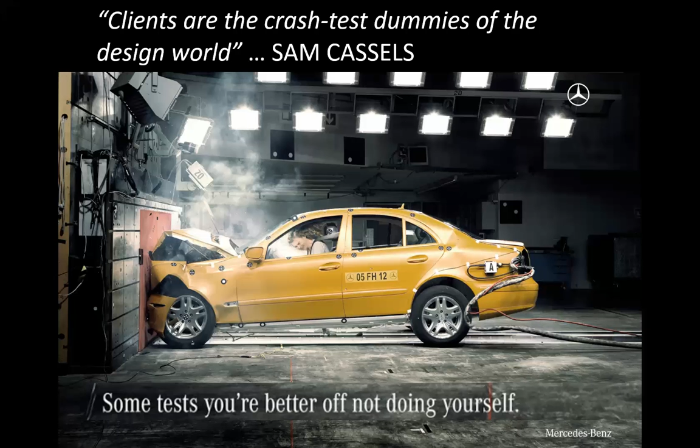And that has all sorts of consequences for people that live and occupy homes, specifically new homes that have been bought from house builders and the likes.

Now, a little bit more about me and my background. I'm an architect, as I say. I'm a passive house architect to boot, so I design ultra-low energy homes. I'm a member of Constructing Excellence in the North East, and I'm a technical advisor to the UK Passivhaus Trust. I'm also a trustee of the Association for Environment Conscious Building. A number of my projects have gone forwards to win awards and been shortlisted for awards in recent years. And I've also had the opportunity to design some of the world's lowest energy homes in terms of them satisfying the world's leading quality assurance standard, which is the Passive House standard.

Now, I've also had the great opportunity to contribute to a book that was authored by, or edited by, Sunand Prasad, who's ex-chair of the RIBA. That was Retrofit for Purpose, where we were looking at non-domestic buildings. And then there's also domestic properties. Some projects that I've worked on were featured in the Residential Retrofit book by Marion Baeli.

So that's enough about me. Oh yes, and I had the opportunity to go down to New Zealand earlier this year to help launch the South Pacific Passive House Conference. So, a little bit more just to set the scene.

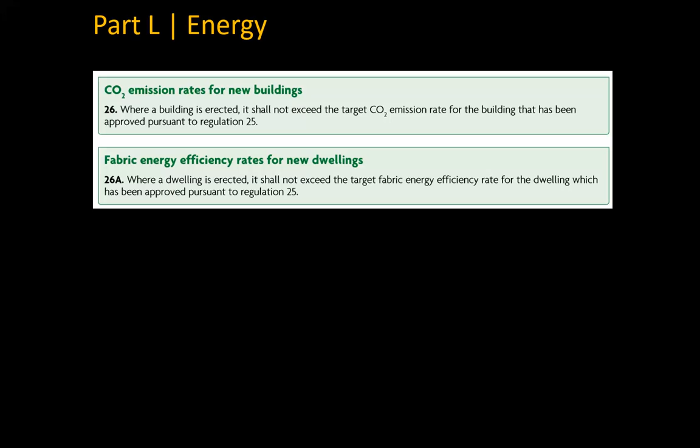So what's been going on over the last 10 or 15 years is that Leeds Beckett University have been measuring the heat loss from houses, without the intervention of people living in the homes. This is a more empirical way of determining how well buildings have been designed and constructed, using a technique known as a co-heating test. I'm not going into the finer details of how that test is undertaken, but it's perhaps parallel to a car coming off the production line and going into a test lab to determine how efficient the engine is and what the emissions are, assuming there's no cheating software going on.

The great thing about this approach is that it's actually taking measurements and establishing clear criteria for performance. It's important to recognise that at the moment, these kinds of measurements aren't being taken in the housing industry at all. So it's basically only superficially regulated through the building regulations as they currently stand, because there's no verification process as rigorous as a co-heating test.

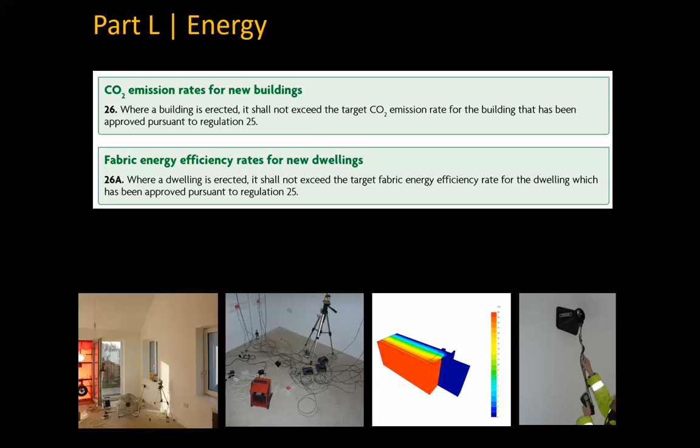Leeds Beckett University have also been taking measurements of airflows in properties, and there are some really important revelations coming out of that. Let's move forward and have a look at some of the data they've produced so far.

In this graph, the vertical axis is the carbon emissions rate, and along the bottom, going left to right, you see various design standards - from Part L 1995 on the far left, through to what was going to be Code Level 6 for 2016. The blue dots joined by blue lines show the designed performance. If we look at example detailed, in blue on the bottom axis, and track up, we see a blue dot - that tells you how it should have performed in theory.

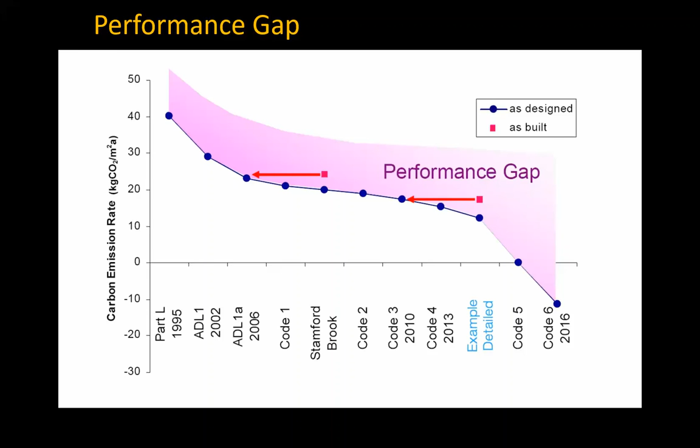The actual measurement, however, is the magenta square - the as-built. You can see there's a gap between the theoretical performance and the actual performance. Tracking over left, the example detailed, though it should have been performing closer to somewhere beyond Code Level 4 2013, was actually performing much closer to Code Level 3 of 2010. It's important to recognise that across this graph, the blue is the predicted performance and the red is the measured performance, and in every single case the measured performance is greater than predicted, often by considerable margins - around 30 to 60% more than expected.

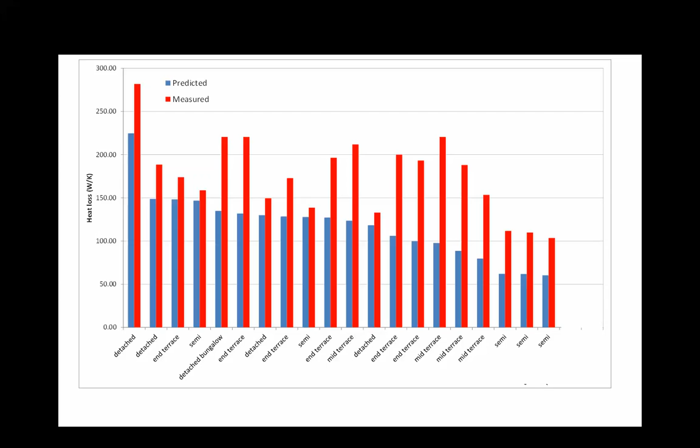That is until we get to the right hand side of the graph, where we see some bungalows constructed in Houghton-le-Spring. These are doing something remarkably different, because the difference between the theoretical performance and the real performance is actually within measurement error of the co-heating test. So whilst there is a slight difference, it's within acceptable boundaries.

Because they're designed to the Passive House standard, they are designed to use a lot less energy than any of the other houses in the study. But I would warrant that you could still have a building designed to achieve the building regulations, so it would have higher energy use, but you could still close that performance gap if you know how to do it properly.

And this is the really crucial thing, because 95% of the dwellings studied aren't actually performing the way you'd expect. So if you're a consumer and you buy a new house that hasn't been constructed and designed properly, you're effectively being missold because you're purchasing faulty goods. Designers and building contractors are designing and building goods that aren't necessarily fit for purpose, then selling them to consumers. So there are some major issues.

Now, these performance gaps can be closed, and the Racecourse Estate, the bungalows on the right-hand side, is a project I had the opportunity to design and oversee the construction of. That really shows these issues can be addressed, and it's not some theoretical challenge we can never close. It absolutely can be closed, so consumer rights can be protected in the appropriate way.

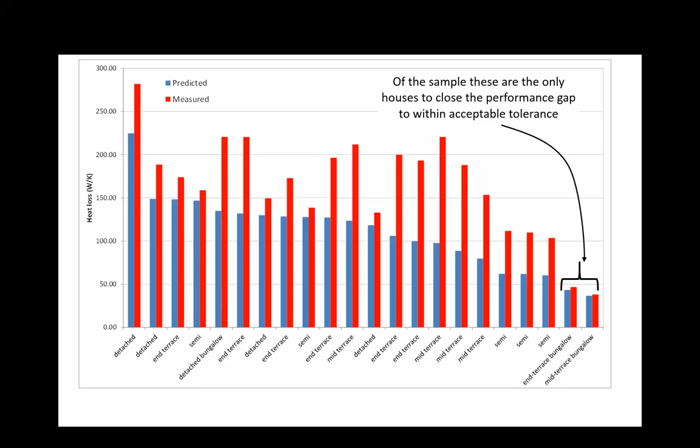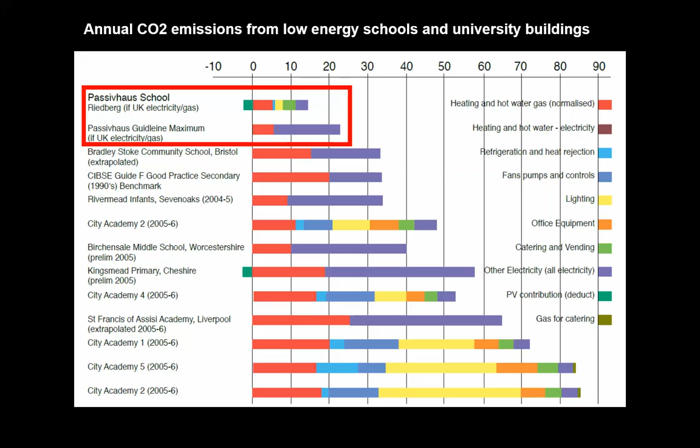The same kind of thing arises with non-domestic buildings. If we look at the red box that's just appeared, within there is the Passive House Standard and the Riedberg School, based out in Germany, and a number of other schools constructed under the Building Schools for the Future programme. You can see their emissions using the graph on the horizontal axis. The target was that they should have achieved 27 kilograms per metre squared per annum, and you can see that hasn't been achieved.

The key thing to recognise is that this is occupied data, and I don't think designers have got a huge amount of control over how buildings are occupied. We can make certain informed decisions, basically guesstimates developed with clients, but we can't really legislate behaviour. So why I really like the coheating test is because it's irrespective of how buildings are being used and occupied—it's a clear clarification about how buildings are designed and constructed, so they're then ready for use by an occupant, a consumer.

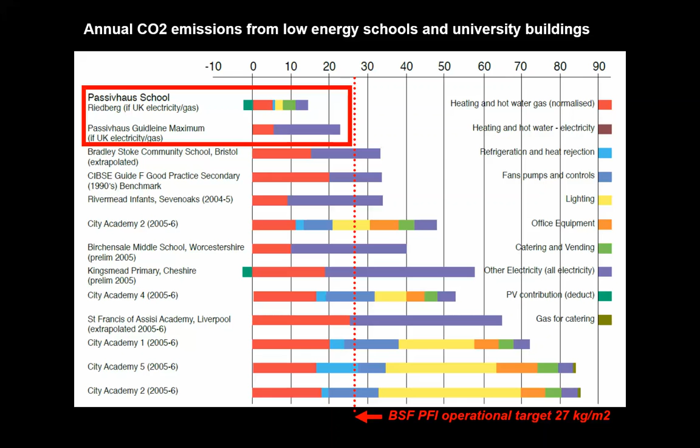So that's plenty about energy. The key thing to recognise is that because houses need more energy to be heated, your fuel bills are going to be higher. And if your fuel bills are higher, your carbon emissions are higher. And if your carbon emissions are higher, you don't just pay more for the fuel itself, but also higher taxes to cover the costs of the emissions coming from those fuels. So there are some major issues cropping up there.

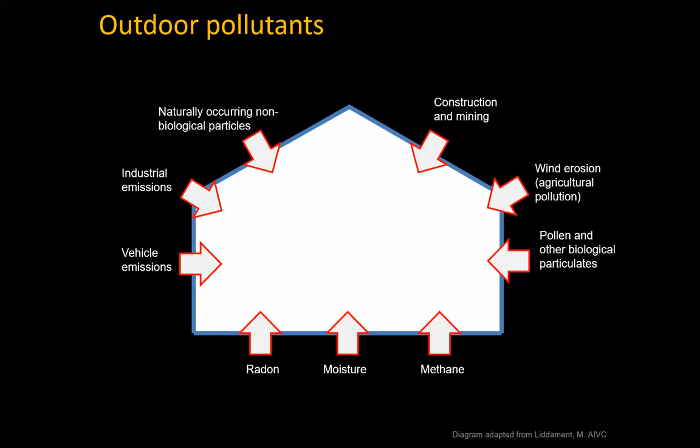Now, if we turn our attention to indoor air quality, we're really thinking about ventilation and the way houses have been designed. It's key to recognise there are ways houses can be polluted from external sources and also internal sources. I'm not going to go into the finer details of those contaminants and their impacts, but the key thing is that these issues arise, and what's been found is that houses are not performing the way they're expected to.

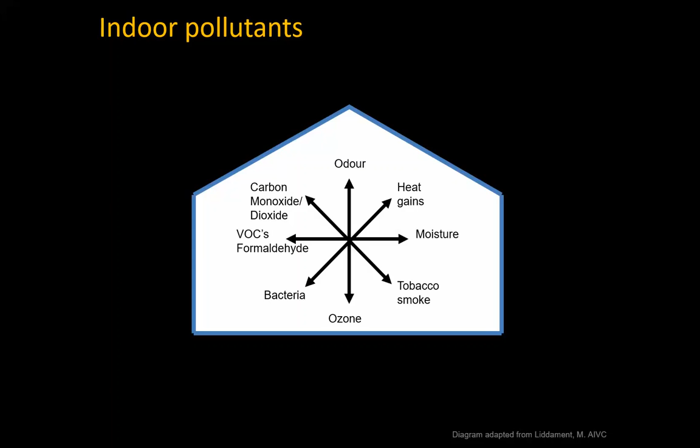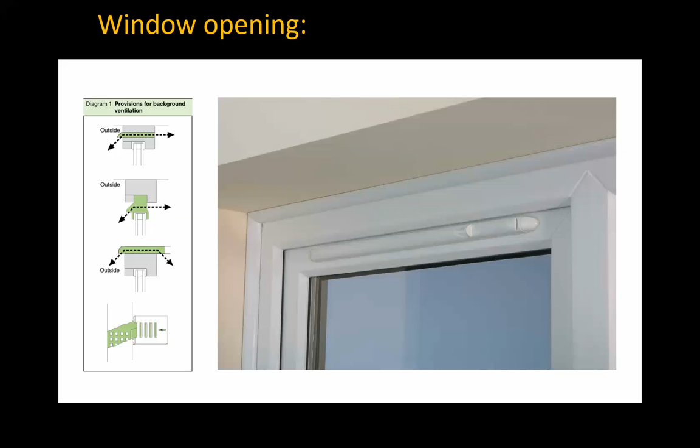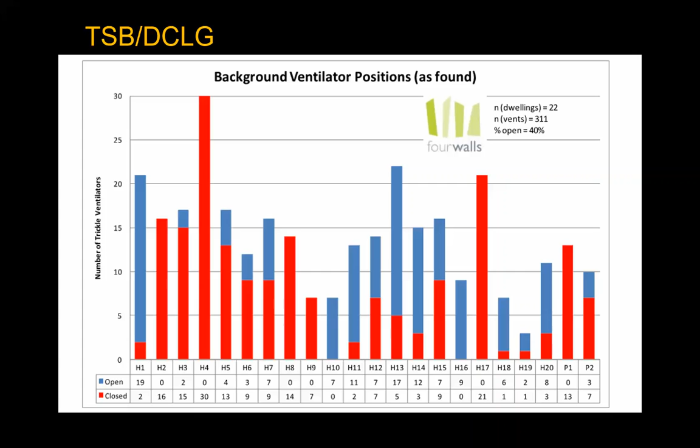In the building regulations there are four strategies for ventilation. Systems 1 and 2 basically use a technique called trickle vents, with either mechanical extract ventilation or passive stack ventilation in kitchens and bathrooms—you'll recognise these by the little ventilation slots above windows, the gaps around windows. Now, studies have found that people tend to close these trickle vents because of cold drafts on the back of their neck, or because of acoustic issues. This means the indoor air quality people expect gets disrupted by their behaviour, because they're placing other things as higher priority, since we don't have a sensory organ for indoor air quality. So there are some major issues there.

But if we go one stage further, there's research by Sterling Howieson from 2014, who identified that an airtight house with trickle vents is likely to result in a more toxic and hazardous indoor environment, with concurrent, significant, long-term and insidious impacts upon public health.

There's a lot to unpack there, but he's raising major concerns that the actual building regulations themselves are not fit for purpose. He says the methodology underpinning current regulations cannot be considered credible, because the ventilation slots are not sized appropriately.

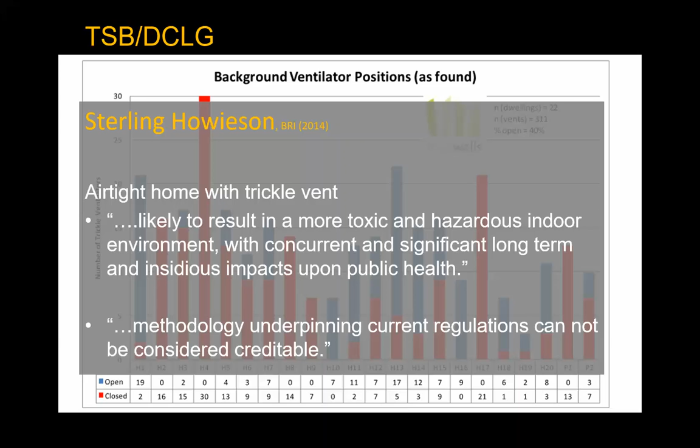If we go a few steps further, studies have shown that where we've got mechanical fans in naturally ventilated houses with trickle vents, in the majority of cases the fans are actually switched off. The reason for that is because of noise issues or people perceiving they're using additional electrical energy, rather than appreciating that the fans are there to remove excess humidity and prevent other risks arising.

So what kind of risks are we talking about? If a building isn't properly ventilated, you can get higher dust mite populations, because dust mites enjoy a more humid environment. The feces from dust mites, found in pillows, beds, sofas, and carpets, help support a higher incidence of asthma occurring in homes. That's a really key issue that needs to be addressed, because the UK has one of the highest asthma rates in the world, so we've got to think about getting ventilation done properly in our houses.

Also, when you've got higher levels of humidity, you've got greater risk of mold growth, and that can cause all sorts of impact upon the health and well-being of you and your family. So making sure ventilation is addressed properly is really key. Unrectified, these problems could be an issue for every owner of the house until it's demolished, both for energy performance and for ventilation.

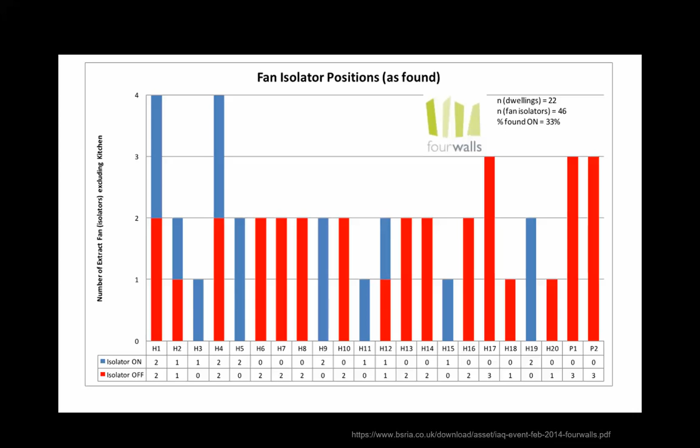If we go one step further and think about mechanically ventilated buildings, there's a study done by an industry organisation called BSRIA. They studied 40 properties, and 95% of all those houses evaluated failed to meet the requirements of the building regulations, and in some cases had numerous modes of failure, meaning various different issues arising. So some key issues there in terms of mechanical ventilation and natural ventilation strategies not appearing to work in the building regulations sense.

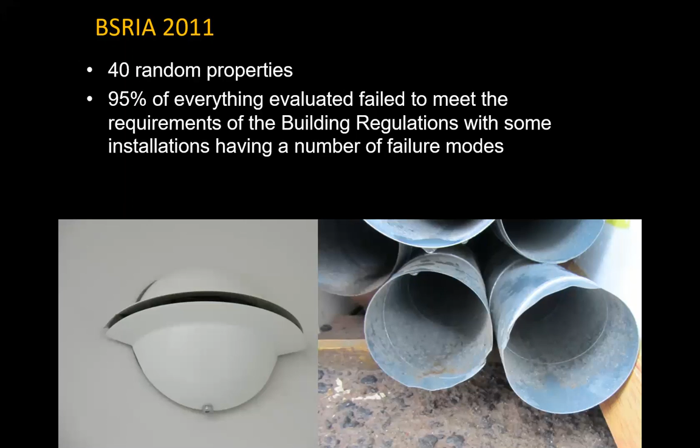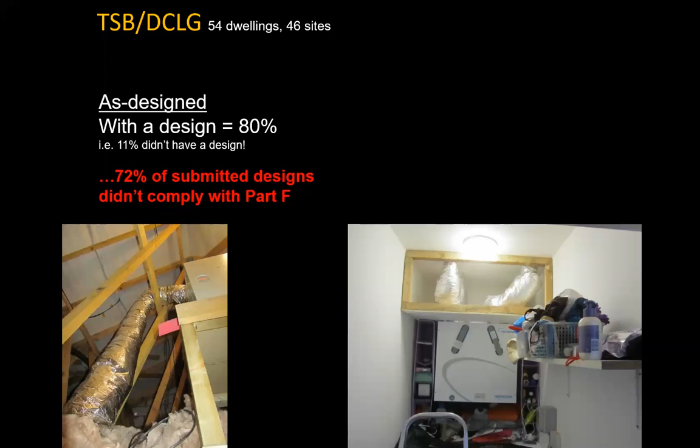Another study looked at mechanical ventilation across 54 dwellings across 46 different sites. It was found that only about 80% had a design for the ventilation system, which alarmingly means 11% didn't even have a design. Of the total dwellings assessed, 72% of designs didn't actually comply with the building regulations. So before you've even got out the starting gates, there's problems existing with designs achieving Part F. In practice, only 19% of buildings as constructed were meeting the regulations, while 81% were failing or in borderline conditions. So there's a major issue where almost only one fifth of properties are actually satisfying the performance requirements. But this only accounts for 61% of the study.

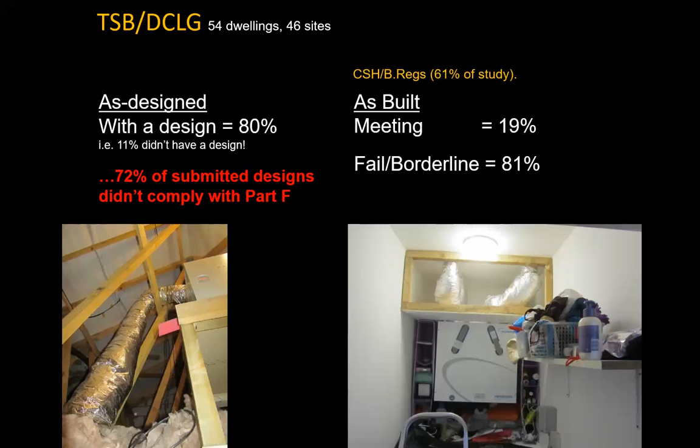A number of other dwellings were also studied, designed to a different quality assurance standard and system - the Passive House standard, the world's leading quality assurance standard for low energy buildings. It was found that 85% of these dwellings were actually performing as required, meeting Part F of the building regulations and the Passive House requirements, with only 15% of the time being failure or borderline conditions. There's still room for improvement, of course, but we're getting much closer to the right kind of answer in this kind of scenario.

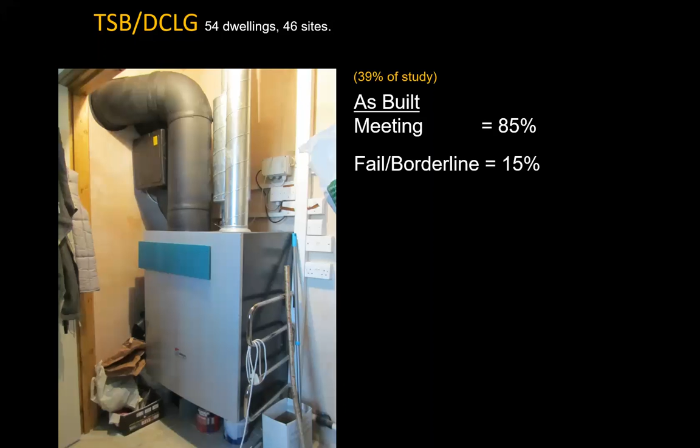And that's, as I say, 39% of the study. So it's quite a significant quantity.

Now, it's not just a case of ventilation though, because noise issues are also a key criteria, and this is something that the building regulations don't actually have a requirement for mechanically ventilated houses. What they have is a recommendation, and the recommendation is that the noise level should be 30 dBA, and basically what the research shows is that around about 30% of people will be dissatisfied with the noise levels

Jack Harvey Clark, an acoustician that I know and I've worked with, we reviewed 1,000 homes and we found that there were persistent complaints throughout the world about noise levels from mechanically ventilated houses. But there was very, very little information about what the appropriate noise levels should actually be.

We did find some information in Finland, and we also found more recently this COST Action survey study that's been done to help inform new developments in the European standards. What we should target from a good engineering point of view is at least 90% satisfaction, ideally 95% satisfaction. So that means that noise levels should be somewhat less than 24 dBA.

Now, what this means is that we've got to think about the conditions under which this should be occurring as well. The research in Finland suggested that bedrooms should be the quiet room, and it should be where the mechanical ventilation system is on boost setting, because what we don't want to be doing is disturbing people's sleep at night and therefore disrupting that can have an impact upon their well-being.

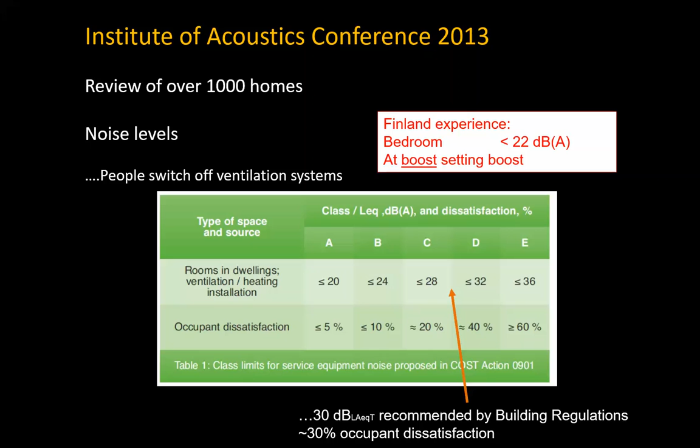So as I say, what's also been found is the positioning of mechanical ventilation units has been particularly flawed, and it's causing some major issues. So we've really got to pay some close attention to this.

Which is why when Jack came along and did some tests at the Racecourse Estate in Horton this spring, the passive houses that I contributed to, then what was found was that the noise levels meant that around less than 10% of people would have been dissatisfied. So around about 90% or more of people would have been content with the noise from the mechanical system.

Where the noise levels were exceeded, it wasn't because of failures in the design. It was actually because people have brought in ticking clocks, or there's fridges buzzing, or in one case there was even grass being cut outside when the measurements were being taken, and that actually muddied the sound.

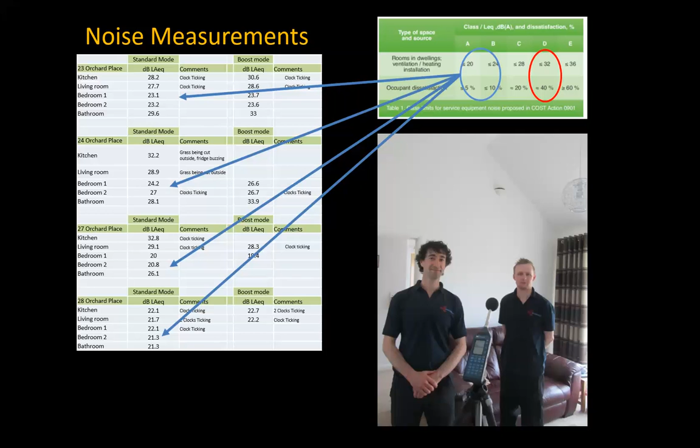But it's important to recognise that it wasn't actually the failure in the design process. It was that people have made a decision to compromise the noise or introduce this aspect of background noise, and that's their decision. You can turn your clock off, you can replace it, you can get a quieter fridge. All these things are under your control, but it's very difficult for you to make adjustments to the noise coming from a ventilation system after it's been constructed.

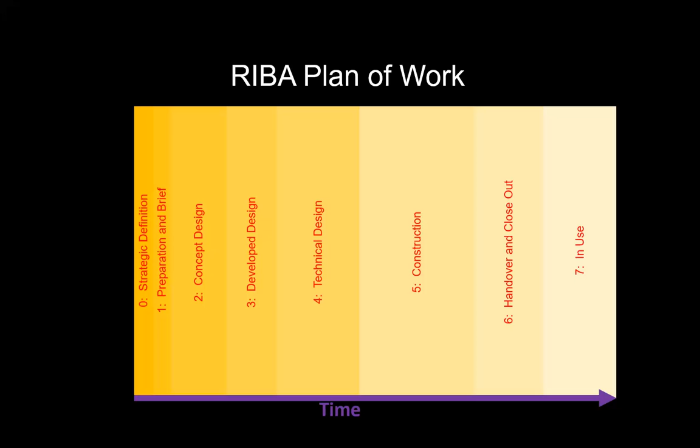So, key thing to recognise is the RIBA plan of work, and let's think about how we can avoid these problems occurring. Now, I'm not going to go through this in too much detail, but basically we've got various different stages from the RIBA plan of work, going from the strategic definition all the way through to in use. And there are different milestones that we have along the way.

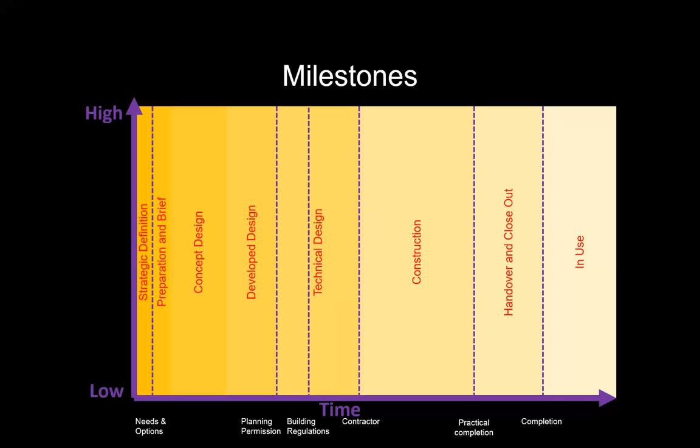Now, the opportunities that we have can be represented on this vertical axis for high and low. And basically what we have is a design process, traditional design process. We start off with a low level of effort, and the effort really then picks up once we get into a more detailed design phase, or we start to look at the technical design, and then it starts to trail off throughout the construction process all the way through to handover.

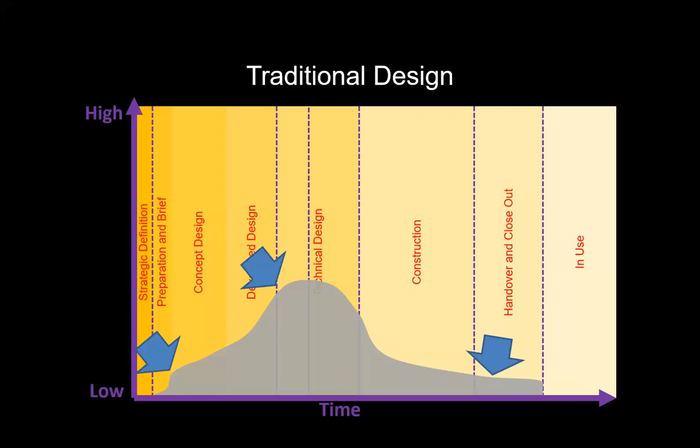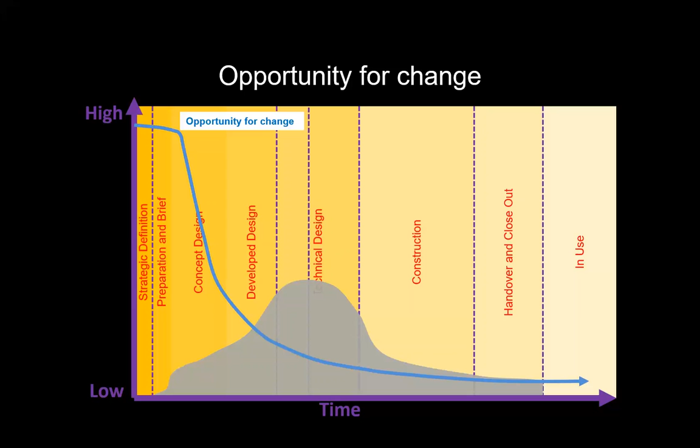Now, it's important to recognise when we have the opportunity to make changes, and what we find is that really the chance to make changes to the building in order to set the right wheels in motion are at the initial stages of a project, right at that early stage, and then they very quickly trail off as the concept design starts to become fixed, or the design moves into the more detailed developed stage just prior to planning applications being made, and then it's even more firmed up when you get into the technical design stage. So it becomes increasingly difficult to make changes because you get various different decisions and lock-ins from different players. You've also got the issue whereby it becomes more and more costly to make changes.

Now, what tends to happen because of the traditional design process is you produce all this information and then get it costed by going out to tender. That's when you find the project goes over budget, and you then have to start thinking not so much about value engineering, but in all honesty more of a cost-cutting exercise, trying to bring things into budget. It's not looking for the optimum solutions anymore.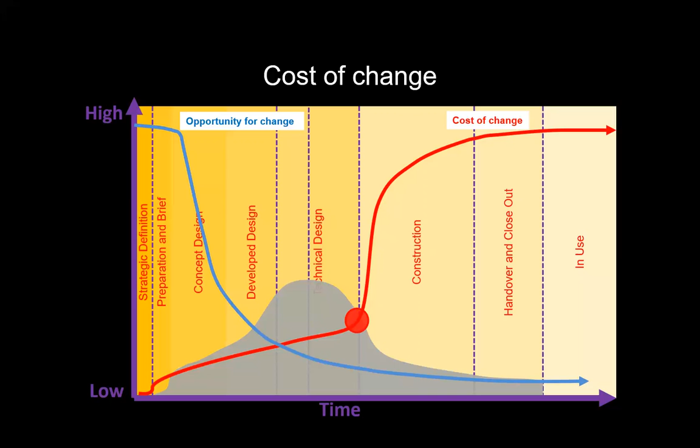So if you really want to value engineer a project, you start at the earliest possible stages, and then you might try to get the right kind of resolution at later stages if you've been using a traditional design process. But the best thing to do is to prepare. In the words of Abraham Lincoln, if you had 9 hours to chop down a tree, I'd spend the first 6 sharpening my axe. Preparation is key.

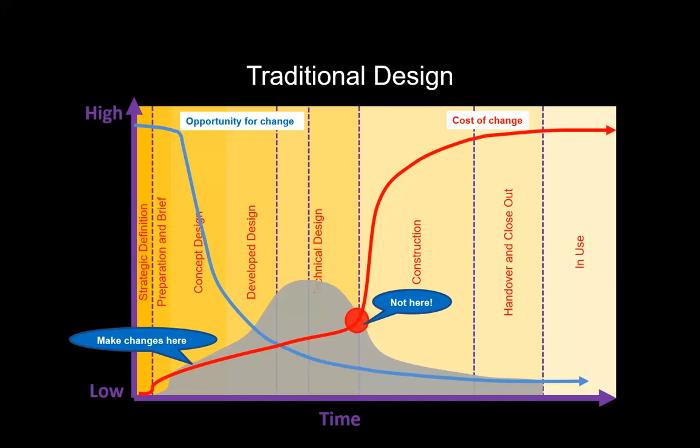So if we start to question the traditional design process, what we want to be doing is making changes early on, not at the later stages, and certainly not once we're on site. So we're looking for a more integrated design process, something that brings things together in a much more concerted fashion from the conceptual design stage.

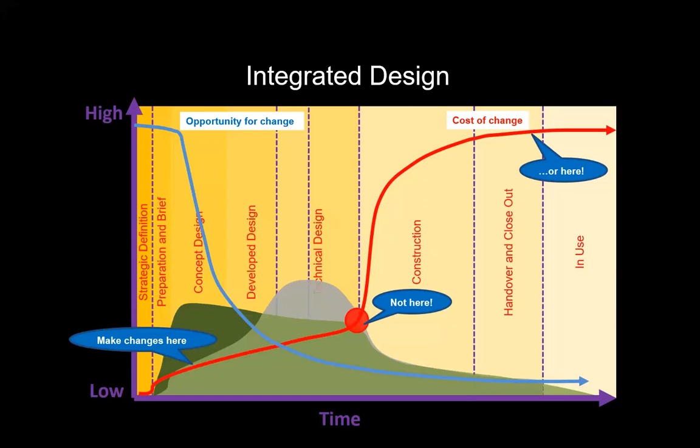And that's what you get with a passive house design when it's been implemented properly. Mistakes can be overcome if they're tackled before they're made. This is all about anticipation and thinking about things in the most appropriate way.

One of the things I do, in addition to designing things through my architectural practice, is work with other architects and do design reviews, deconstructing their buildings before they've been built. We look for details that could cause issues and complexity that could put them off their course.

This works particularly well for Passive House or AECB silver homes — going through and redlining the drawings, identifying construction details that could be a challenge, and then identifying construction technologies that can deliver the appropriate performance, looking at how details can be rectified so they deliver the performance required. Therefore, we can start to deliver buildings that perform as predicted.

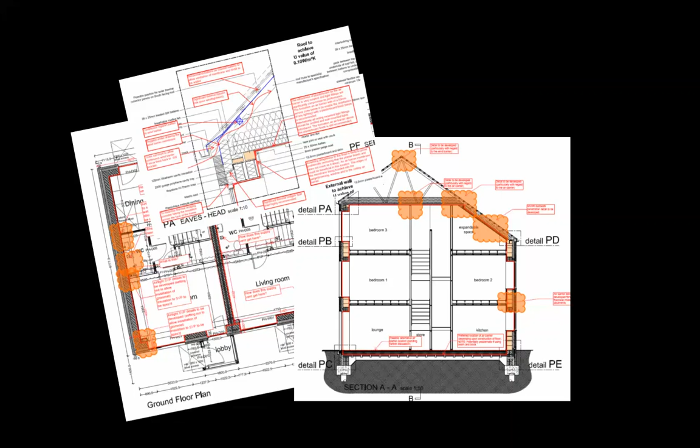And obviously that means that when the properties are sold, the Consumer Rights Act is observed. Now, a lot of designers tend to push a lot of the work onto the building contractor, suggesting it's actually a construction issue, but in my experience, the evidence suggests otherwise.

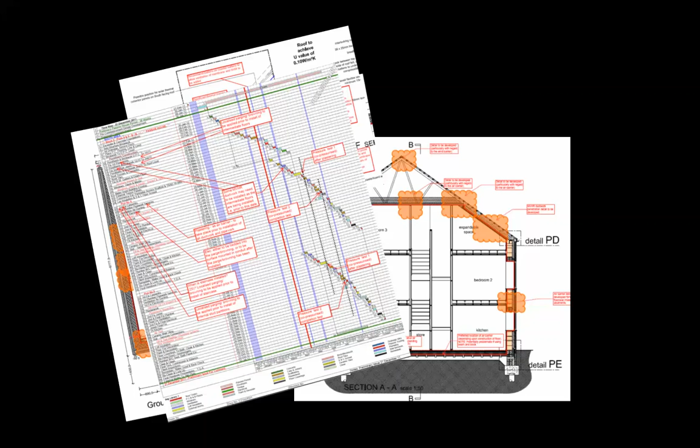So really getting to grips with the construction program and thinking about how the contractor is going to build out the houses is key. It's not just a case of looking at the construction details and making a few comments. And then also doing site evaluations, making sure the systems and components have been assembled correctly and ensuring the quality of work is appropriate.

I also have a traffic lighting system which enables coordination throughout the design team and makes life a lot easier for both the design teams and the contractors.